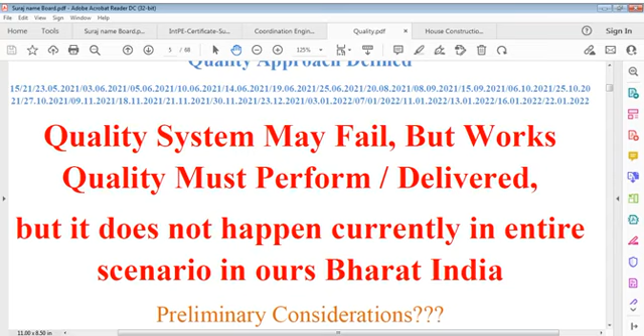You cannot sleep and just think it will work automatically, because this can cause accidents, this can cause mishappenings.

Solve all our problems ourselves. Nobody else is going to solve our problem, and that's where coordination is a very important part of life. Coordination engineering projects, public and engineers.

It is very important for reliable quality engineering deliveries - coordination engineering is a must. Professional engineering requires it, and not just for professionals; the public must also have awareness. Missing coordination means missing good engineering, and this is a very important point. Just like we say safety is a must.

Safety first - we usually call this a very common slogan. Safety is number one, which means first we have to consider safety, and then you can do whatever you wish, whatever you have planned. Even if you walk on the road, you have to keep yourself safe from vehicles, from stones lying here and there, from pits, or from whatever else, from slippery surfaces. You have to walk safely, and that means you have to look after all these points.

Missing coordination means missing good engineering. Just like we say safety first, I say quality first and quality must. We cannot say quality is second, just like safety is not second - quality is also first, but first safety has to be considered. Then in work results, quality is first and quality is a must.

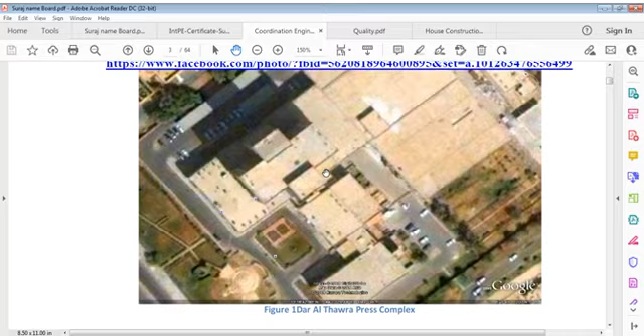And this is another project - this is Iraq, Baghdad, 1982, and this is Dar Al Thawra Press Complex, RCC Tower. This is an RCC tower, and these are towers for cores and stairs. There are so many other buildings around, but this was the tower portion, which I did as in-charge of this project on behalf of the subcontractor.

This is a file which is done for representation of formwork, how formwork is done. For that purpose, it's all line work worked up on a drawing file. It's drawn, and this is the lift well, you can say elevator well, RCC well. Generally it is done everywhere using RCC.

All these lift wells, but in our country people don't do this - they do brick work or some do block work. I have no problem with that, but here I say the lift well is RCC walling around, which can act as a shear wall as well. So it's dual purpose. Then there's another plate.

This is a photograph for an ethylene plant, located 300 kilometers from Abu Dhabi.

This is Abu Dhabi, 300 kilometers from Abu Dhabi, in Ruwais city, Ruwais industrial city. Here I worked in 2000, 2001, 2002, for around 3 years on this site on behalf of Al Jaber Energy Services, which was part of the Borouge project, Borouge 2 project, or Borouge 1, the Borouge project. Borouge is an oil company of Qatar, of UAE.

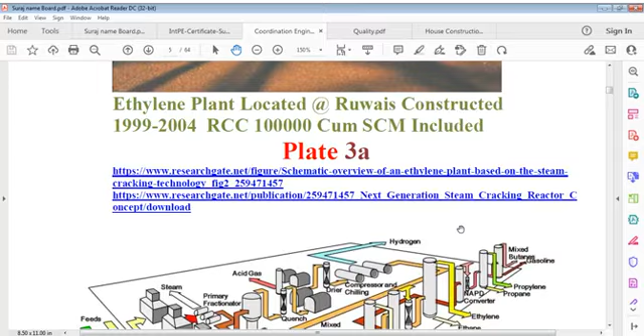This is just a procedure, a schematic drawing. I just downloaded this from one site, and here is a schematic overview of an ethylene plant based on steam cracking, from researchgate.net.

Here is another drawing of a substation, a typical RC substation located in the blast zone on that plant. It's a complete RCC framework, RCC complete cellar, an ordinary structure but an important one. This substation has to supply power after obtaining it from the mains, overhead lines, and give it to the plant.

And here is another plate for a firing range. This was constructed in 1987-88 in Barjan, 2nd Royal Guard Army camp in Qatar, on Dukhan Road, Doha Dukhan Road. This was RCC baffle walls - these are baffle walls, you can see these are baffle walls.

Here are gantries around, and there are subways. This portion is open to sky. This is a bullet trap, the main building, and here's the bullet trap chamber. This is the shooting area, and this is the firing area, with gantries this way. This is important for purpose of training.

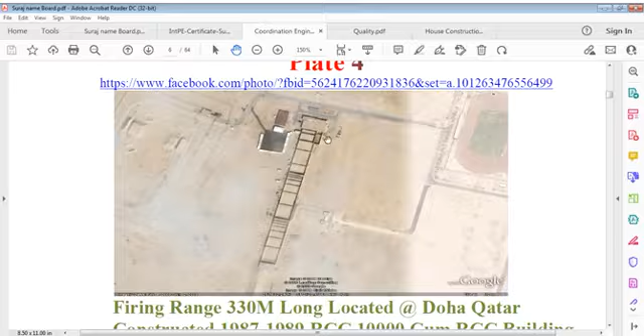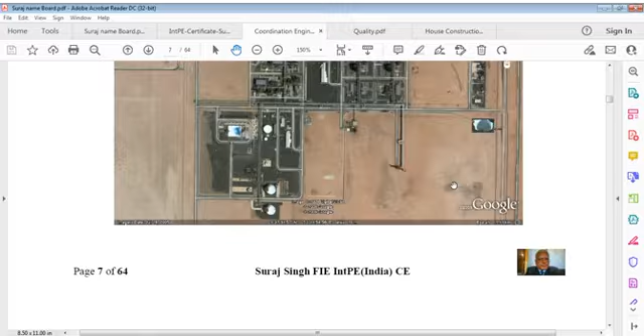And here is another one, then some details are here. This is the same, the seawater basin. We are getting water from here.

So seawater from sea, this is 84 inches, 7 feet, or 2 meters, you can see more than 2 meters. Two pipes, twin pipes we used to call it. This RCC structure is completely a pump house RCC.

This then goes here after going to all the plant where it's required to cool down equipment, and then it's returned for purpose of recirculation after treatment, and once it's gone it is then disposed of permanently.

This is also a very big water reservoir, you can say a water retaining structure, for which the quantity of water is too high, and it was complete engineering, and we did all water tests according to BS 8007.

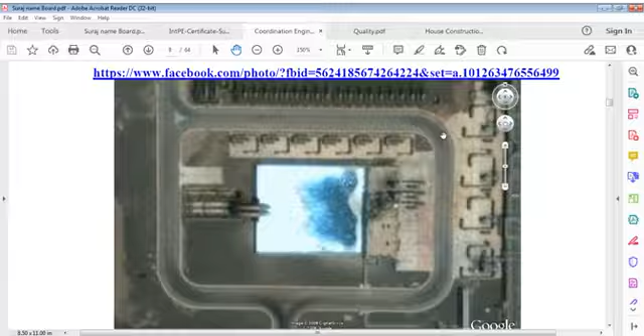And here is, you can say, another one. That plate is this record building, a very small building but very important, because it is part of the plant facility, or processing plant, located in Mesaieed, Qatar. This is outside that premises because for purpose of standby—inside there may be record keeping, but outside, in case something happens, it should serve.

And not only this, another one about 100 kilometers from here itself. This is an RCC building completely, and there's a lift, which I try to show you certain form of here. And there are some chiller units and various other service units here, on the roof likewise, and so many other points, and the water tank on the ground, service area, electrical service and other services. There's a guardhouse here, and it's very very small.

They are small or big, but the question is that we have to talk of quality. I don't feel shy in saying that it's small or big, doesn't matter.

Construction starts here in 2010. It was, you can say, Al-Tunsi company. Al-Tunsi, you may say, is the owner of this company. It's a ministry project, and it was, you can say, one for learning, but its structure had been completed before I joined—I looked after it. There was a very delayed project, you can say. Of course, it was interesting.

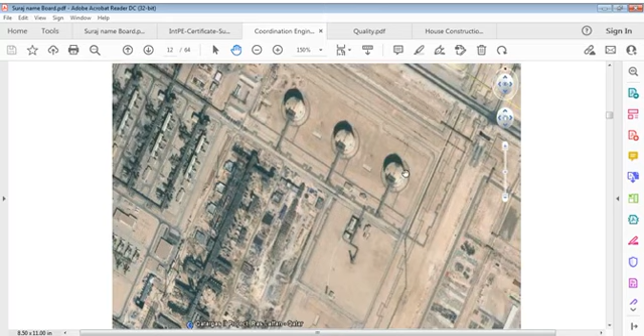And of course I go to the other one. This is the LNG plant location, Ras Laffan, Qatar. And these are the tanks I'm talking about. I talked about this already. I was part of this in

1996 - sorry, 96. These are 3 tanks constructed by the TBMM consortium, and Midmac is one of them. I worked on behalf of Midmac as office engineer for 1 year for these tanks.

My role was for surveys involved in this, and I was also technically responsible for the beach villa project in Midmac. So I learned about this, how these tanks work, and that learning is of course very good because it's a petroleum or oil project, onshore.

People know what LNG is about. There are two tanks - the external one is RCC/PSC tank, concrete, a massive one, heavy work you can call it, because walls are minimum 800 and diameter is more than 76 meters, and height is more than 50 meters. It's very heavy for containment of LNG, and that is minus 160 degrees storage.

And concrete is not for that purpose, so there's an internal tank which is of 9% nickel. You may say nickel alloy, that is for the purpose of cryogenicity, to increase the cryogenic property of the steel.

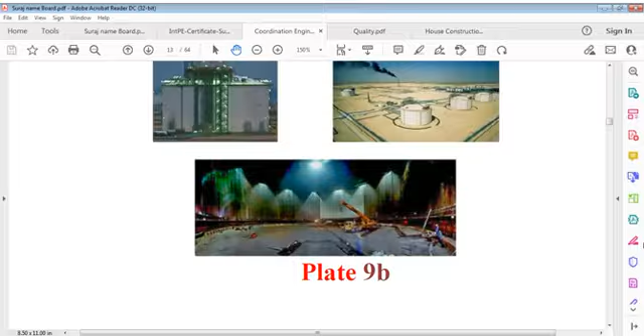Once the RCC external tank is over, this is the other tank, you can say. Here we may say that is used like that, and we have to move further onto this, and we can say that yes, it is.

And then we have here, this is during construction itself, as usual, this is the same tank. RCC stays in the construction towers, because many tower cranes are there, and I used to walk here everywhere to see at the time, and I was impressed with the quality at that time.

In '96, you can say it is 26 years back. So at that time it was good - I was impressed with the quality in that.

And this is that plant's administration area, here administrative and warehouse area as well. Very ordinary structure, this building is RCC, and this building is also RCC. All these buildings are RCC structures. Of course, this is a steel building because it's a warehouse.

And then we have this, this is very important - I'm showing you an example of coordination, you can say. Real coordination, or engineering coordination, you can name it. It's a very important point.

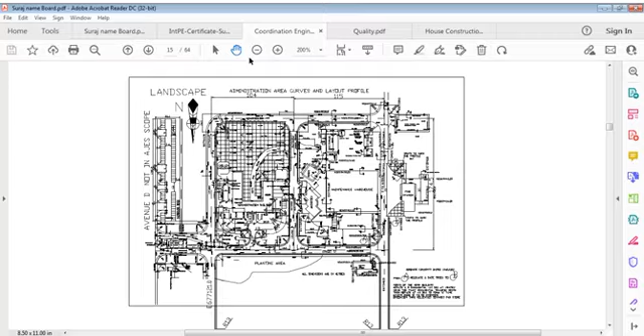Actually, I still remember that time when I was on this project, and I was busy - I tried to remain busy on such works. You may ask me why I'm telling that. Yes, I'm telling because there were no such details available, and I used to find big problems there for the purpose of coordination and engineering arrangements.

So, this is just one part. I actually worked on this as well as the complete plant, for the purpose of showing how to do it and understand it. Maybe you're not able to see this clearly, but I can show you another view so you can understand better.

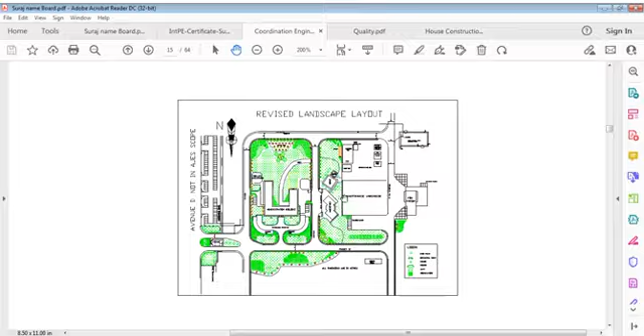This is actually the administration area, though it's a landscape drawing, that's okay. This is the administration building, this is the amenities building, this is the mass prayer building, and this is the area for the warehouse, etc. And this is other structures, and here is a certain firefighting area.

This is something different, which I just blew up. So it's the effluent area, here. You can say it's not clear, so let's blow it up more. It's the fire station, and this is disposal of waste here, and the maintenance warehouse. This is amenities, and this is the mass prayer area. Likewise, I'm not going through everything.

And here is the consumer estate gatehouse, and this is open parking, the chiller enclosed area for this building, access to this building, and this is the pathway, etc. This is generally called the administrative area.

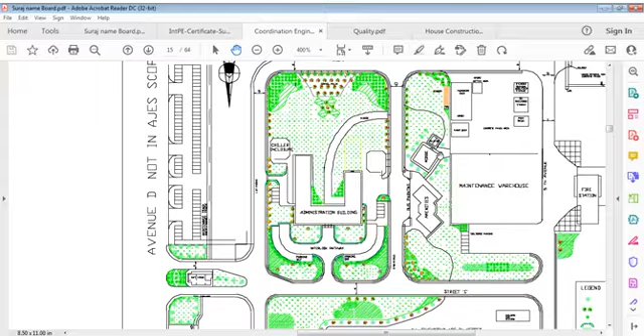Now you may be able to see why I took this, for the purpose of roads and internal streets. These are roads, you can see them coming here like this. Elsewhere, we had to work on the actual landscape and roads.

I had to set out exact information for the purpose of shop drawings for roads and shop drawings for landscape. Though it's not structural, it has to be done accurately. We did a lot of work on the landscape. I was involved personally, with no input or support from someone else, but I did a lot of work on this complete plant, and a big drawing was posted.

Actually, that should have been given by the designer, but the designer had made many pieces, produced many pieces of various parts, but I put it together like this everywhere, and I successfully did this. It helped me because I had to coordinate with various problems, and we had to produce the landscape plan and landscape details, which could not have been possible otherwise.

Still, I feel happy to see this again, though I did this myself and it took a lot of time, and people could not understand what I was doing. So I'm not a layout planner. Yet it doesn't matter what you are, it depends on your concentration.

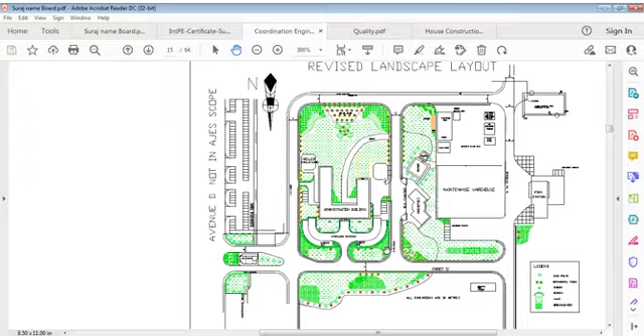And of course, for this purpose we have to do it. Then we go to, it's some, I just broke it down so you can see clearly.

Now this is again, you can say, cracking furnace, a part of that olefin plant. Very much structural work with RCC foundations only. And you can see so many piping equipment and all that, which I do not know what these are, but for purpose of foundations we have to deal with all. And same, this is another structure, steel structure with RCC foundations, and all mechanized work.

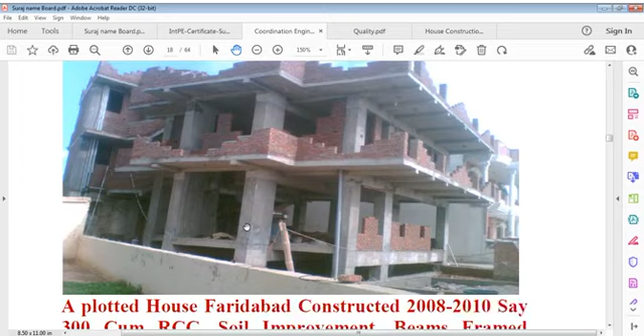Now this is RCC building, a residential building, and we can see a kind of framework. These frames, this is basement, cellar, and this is RCC beam with columns here, beams and columns, which were worked out based on Kani's rotation contribution method, not finite element, and it was done. You may see plans of that, you can find something interesting here.

I'm feeling a little cold. I don't know if temperature falls, let me check it, it's 16, still 16. I'm feeling cold, there's no reason for that because the dew point is 8, and that's the reason. So I had to be suitably oriented with this, and I just wear my protective clothing because I can't tolerate cold. So we can say very well, okay, fine.

It's now time. Now these plans I'm showing you are important from an engineering point of view. These are detailed engineering plans, only a few I am showing. There are many from a professional viewpoint, but I am showing always strictly here.

This is one plan on ground level, and here are some elevations put in that way so that it was easy to draw, because I know 2D, not 3D. I'm not very much good in 3D, I don't know what's 3D, but I haven't practiced AutoCAD for many years.

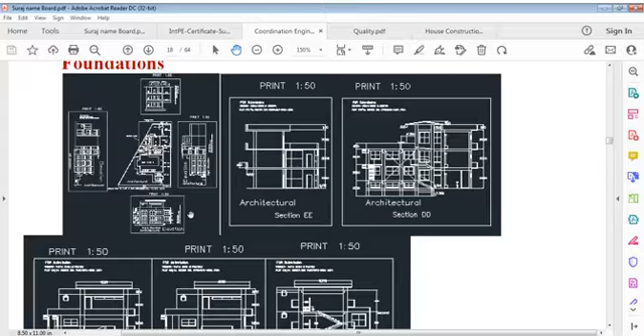And this is a certain section, and this is also a certain section. And here is the stair. You cannot say exactly what it is, but this is the main stair, it's inclined, or you can say pitched. This is the stair cover, and here is second floor. This is basement, it starts from basement, goes to the basement area, then ground floor and first floor, and this is second floor. Likewise this stands many more.

I cannot put everything here just for purpose, and so many drawings are here. I can't show that drawing also because it's in drawing format, and this is not drawing format, it's PDF. And also you can see this, and we have to go for this purposefully. And there's also structural arrangements, just a few pieces I have put in.

That's foundation plan, so maybe you may not visualize what I'm showing, it's a very different plan. My thought on foundations, where integrity of the building is involved, or where uniform distribution of load is involved, or where horizontal seismic forces are involved, horizontal seismic shear, is that I use a different method. It's neither raft, not piling, not isolated footings or independent footings, it's not all that, it's something different. And that point you have to understand very clearly.

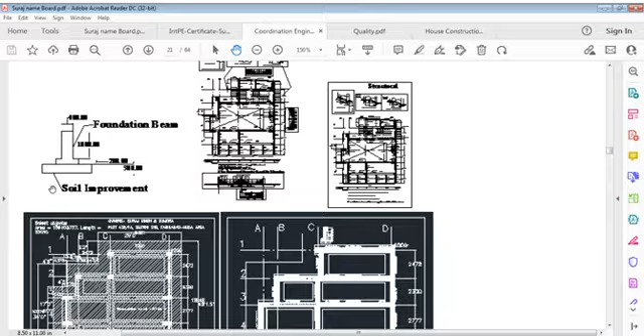I'm not simply talking, but giving you evidence that I worked on these foundations, and this foundation is very successful. It's not because there's a technical reason, but I simply think that if you use brick walls and construct a building, we assume that this is also brick, so it can't go anywhere. But important is here, this portion of rectangle.

This portion rectangle is a soil improvement, because this strata has clay up to say 8-9 meters down. We cannot transfer such load to clay, it's risky. So you have to replace a certain portion of the foundation, to change the clay or replace clay by granular material. Granular material is usually the material used in water-bound macadam road structure, a kind of same material of a different ratio and different requirements.

And on this, RCC beam has to rest. This RCC beam moves around the whole area, connecting column to column, and in fact there is no footing of conventional style, this beam connection itself is the footing. It's kind of both ways, x and y axis, it moves in the same section. So this beam holds, under ordinary loading, but when there is horizontal shear impact, this changes its function and resists seismic shears.

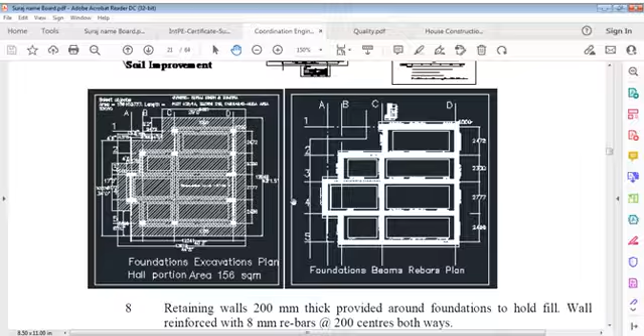And same way, here is something different, you can see. Various sketches are there, only a few sketches I am showing. In fact this is foundation and this is excavation. These are foundation beams, all foundation beams, and this is excavation scope. This is important, it takes time to understand, you see the foundation plan, a particular area you have to excavate fully, and that's what I can say now.

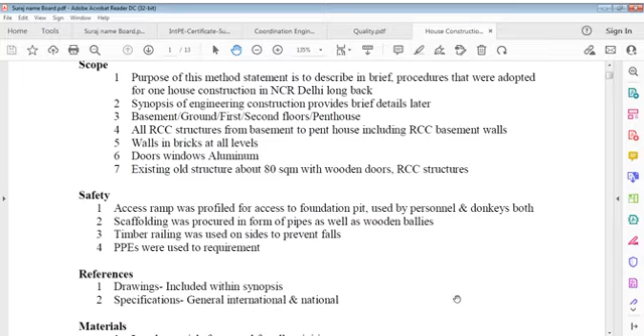I'm just first trying to show sketches, and that's very important, we can discuss that. Let me go discuss first about the purpose of these documents. What is the purpose here, why did I do that? I will just read first and then we'll discuss. It's still very important here. Okay, my percentage is at 3%, 52.

Now, the purpose of this method statement - actually it's a method statement, let us say, because we have to understand what we have to do. That is the first requirement in construction: what we are going to do, why we are going to do it, what's the background of that, all we have to know. It's not enough to just know what we are going to do. We need to know why, from where records are, what was originally recorded, and what we are doing, which I understand means it's not simply isolated work, but complete package work.

You must refer to all records, all documents, and that's the purpose of this method statement: to describe in brief the procedures that were adopted for one house construction, done long back in 2008, 2009, 2010, or beginning of 2009 to mid of 2010, about 1.5 years. Ordinary construction, but time consuming because of many reasons. A synopsis of engineering construction provides the brief details later.

Now basement was scoping - this is a basement, ground floor, first floor, second floor, penthouse, etc. All RCC structure from basement to penthouse, including RCC basement walls and walls in bricks at all levels, not in foundations. That wall of bricks also, half brick, for purpose of filling in, exists on every floor except in basement.

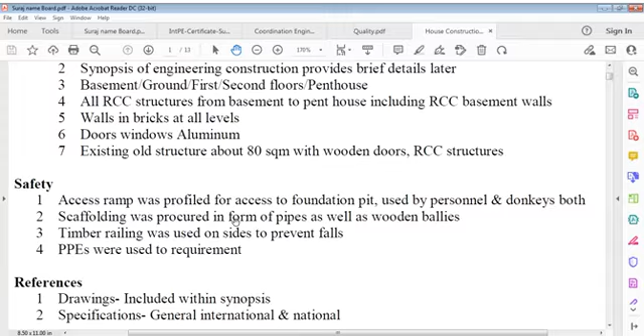There are two structures in this: one is the existing single story structure, which is about 80 square meters, and the other one is an extendable hall with first and second floor also. So what was there?

Safety - the access ramp for excavation was profiled for access to the foundation pit, used by personnel and donkeys, workers both. Scaffolding was procured in form of pipes at that time, not structural scaffolding, a cuplock system like we have these days. The scaffolding was just vertical use pipes, separate pipes, so no problem, it was braced in. Scaffolding was procured from pipes as well as wooden ballies, not for structural use, just for access use outside.

For instance, when we needed some support, I did not use ballies for vertical propping, no, it's only steel jacking. Then PPE were used as required. Timber railing was used on sides, for instance, for safety issues that I'm just giving to you.

So reference all drawings and specifications, general, international, and national. Then there's a column log of materials - local materials used for all activities. Structural materials were procured from quarries. Reinforcing bars were procured in full length at 12 and 14 meters without having any bent bars from industrial site or factory. All reinforcing bars were fabricated on site only, under direct supervision. Concrete was mixed on site since RMC was not consistent in quality. Formwork was designed using plywood and wooden battens, both hardwood and softwood.

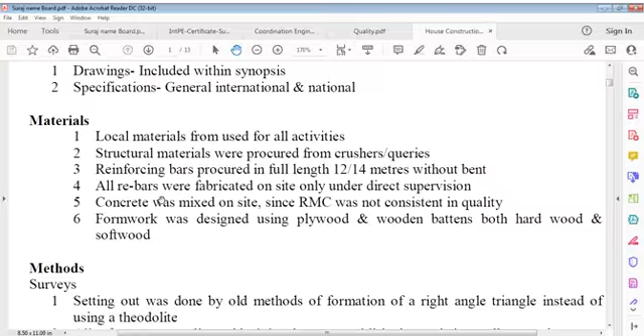Same thing happened with RMC. I wanted to use RMC, but when I talked to some RMC guy, he did not have any standard quality systems. They just say, no, this is this cost and that cost. If I raise questions about cement, about what metals they were using, that person had got no clue, no answer. So I said, there's no meaning, I can't trust you. You want to say more quantity of cement will give. And they think only cement is more important, nothing else. Will give you more quantity of cement, so many kilograms of cement. I said, thank you very much, I can't understand you.

And also these bars, we can say 12 or 14 meters bars. I said no to agency for bent bars. We have to procure only straight bars. We have to pay for trailers if you can't pay. And I did not get any bent steel. I'm dead against that, and all buildings say 95 to 98% buildings use rusted bars, bent bars, which are straightened first. You see, beauty is first you bend and you straighten them. So what do you call that? I don't understand any logic behind that.

And whatever formwork we used, our own system, our own fabrics, ply, our own designs of that, particularly in columns and slab. Because we casted column one time, 3 meters column or 3.5 meters column or whatever it was, it was casted full height one time.

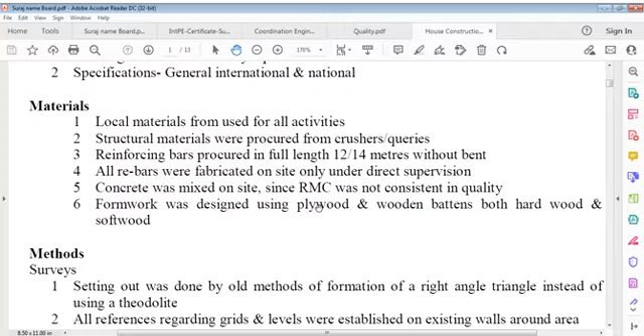Method statements are very, very simple. Sometimes if you know what you have to do, if you know the sequence, then it's only a kind of format filling. So you are not going to do any research work, because research is already available, and what you learned, that's also a kind of research.

So we have to be very careful, and in fact, for this building, we did not have any theodolite to start it. But this is a small plot, and stones are clear. You have to... so you can see that setting out was done by the old method of formation of triangle, right angle triangle, which is 3 base, 4 height, or you can say 3 is base and 4 is plumb or right angle. Then if you join both corners vertically and horizontally, you get a diagonal.

Diagonal is important here for purpose of right angle formation, and that is 3, 4 and 5. Just 3, 4 and 5, that's the meaning of that right angle triangle.

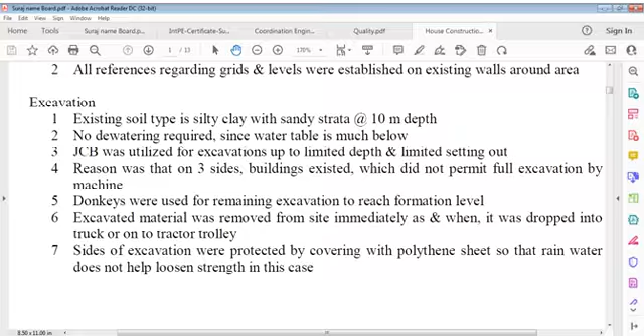Donkeys were used for the remaining portion of excavation that could not be reached by excavator. Excavated material was removed from site immediately as it was dropped into a truck or onto a tractor. Excavation sides were protected by covering with polythene sheet so that rainwater does not help loosen the strength of the strata.

Blinding is a very common term these days, but not in our country. We had different terminology. My God, something plastic again for me.

Since soil bearing capacity was not safe to allow heavy structures of this sort, soil improvement was conducted by formation of an improved layer 300 mm deep, as explained later.

You see what's happening, gastric again.

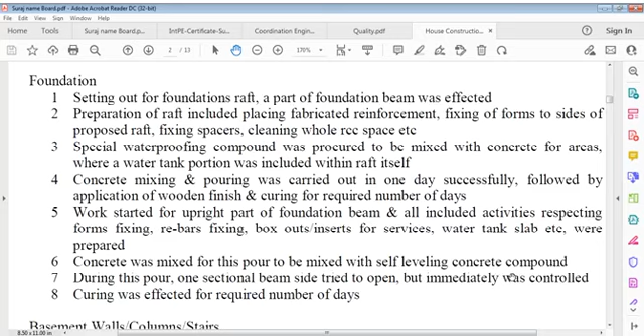All included activities - erecting forms, fixing rebars, fixing box outs, inserts for services, water tank, slab, etc. - were prepared. Concrete was mixed for this pour, to be mixed with self-leveling concrete compound. During this pour, one sectional beam side tried to open, but it was controlled. Curing was effected for the required number of days.

This is just a brief on these beam foundation walls - only brief because it's a different type of work. Conventionally people don't follow it; it's completely structural design based work, and therefore a little different. Beams are not very common in foundations, but I standardized it and I can say it's very useful. There's a reason for that.

If you use isolated footings or independent footings, you won't get as much resistance as in this case with beams. If I use isolated footings, I may have to use compound footings if required, and if not, then ordinary center footings, but we'd have to do cantilever calculations on that - which means an expensive option. But in this case, when all are combined together, cantilever doesn't mean anything. If there's some meaning of cantilever, it's only for the spreader - just 200 and 200 both ways, 200mm this way to one foundation, then 200mm that way. That's not going to work in this case.

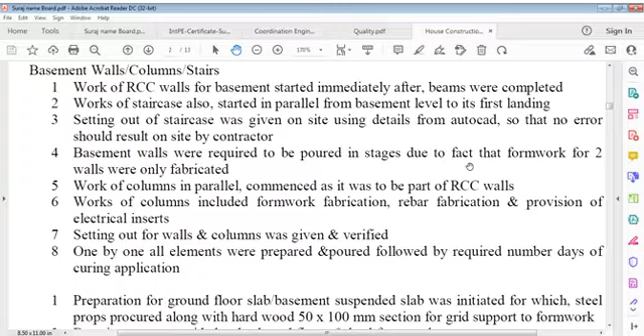It's 5 o'clock. How much time have we gone? 1 hour 19 minutes only.

So we can say work of columns in parallel commenced as it was to be a part of RCC wall. Work of columns included formwork fabrication, rebar fabrication, and provision of electrical inserts. Setting out for walls and columns was given and verified. One by one, all elements were prepared and poured, followed by required number of curing applications.

Now it's only a few lines I give to you. The problem is we have to understand coordination. Sometimes I give you my own writing for coordination, and it is really interesting to read. It's in book form, an important one. At that age I wrote it, and still it works, I think. Still it works, and that is the beauty of it. It's not because I have to tell you what it is, but because it's a very important one. It is a coordination issue. That's the important one.

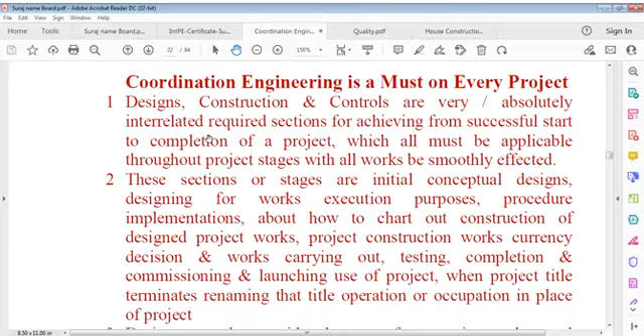If an item is misordered, delivered, and even installed, test results shall reveal its unworthiness, and replacement shall jeopardize the price of the contractor and the working of the system. So sanitary planning should be rated as a special element in civil engineering construction for building projects.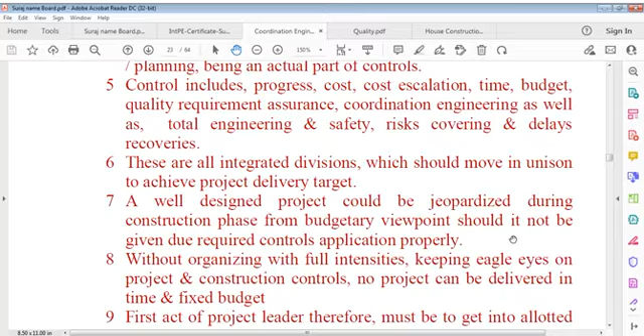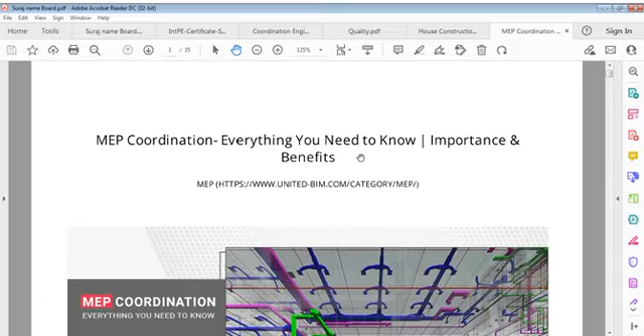Now to go ahead, the MEP coordination file is here, and we can blow it up a little. You can see this file here, I'll show this as MEP coordination. You can see this drawing. This is definition, process, importance, use of BIM benefits, approaches, etc. You can see various services here, and this is the introduction of MEP coordination, coordination design philosophy, so we have to design coordinate drawings, etc.

Now, what does MEP coordination have to do with this? If you don't have time to read the whole big document now, there's no worry at all. We'll send you a copy so you can read it when it's convenient for you. Just let us now know about the building design phases.

The American Institute of Architects Pittsburgh has separated building design into 5 phases: pre-design, schematic design, design development, construction document, and construction. So now, what are the approaches for design coordination of a construction project? Traditional approach.

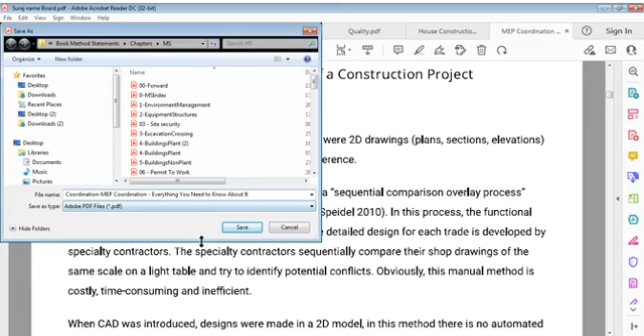For many centuries, we can say, the basis of architecture projects were 2D drawings - plan, sections, elevations, those elements. It is hard to find out interference.

For many centuries, the basis of architecture projects were 2D drawings - plan, sections, elevations - and in those drawings it was hard to find out interference. Traditionally, MEP coordination is conducted through a sequential comparison overlay process. In this process, functional design is prepared by the consulting engineer, while detailed design for each trade is developed by the specialty contractor. Specialty contractors sequentially compare their shop drawings of the same scale on a light table and try to identify potential conflicts. Obviously, this manual method is costly, time consuming, and inefficient.

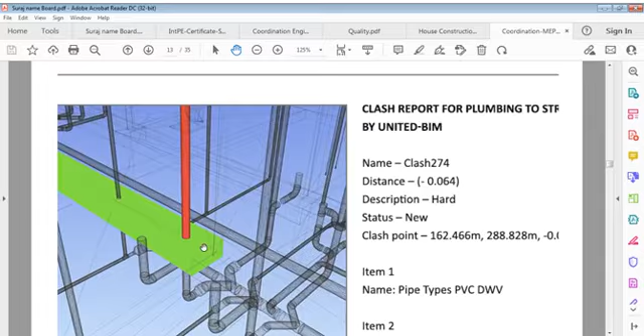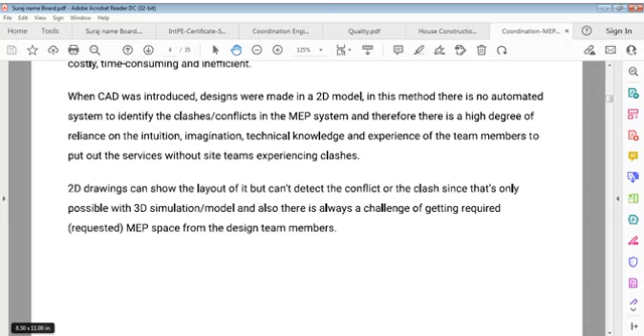We are not interested in conflicts at this moment. We're interested in what to do, how to do it. I'm not interested in 3D modeling also.

With respect to MEP coordination, the traditional design process relies on completed design from all project participants - that is trades and disciplines - while in the BIM-based approach, it starts in the earliest form of design development.

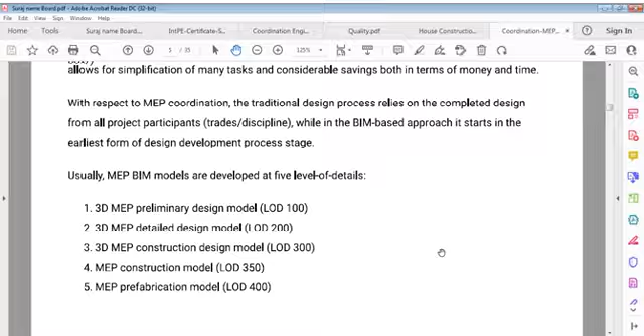It says usually MEP BIM model, I'm not interested in this. See, this is unnecessary, I'll remove this if it's that one. Now we are just seeing what stages are there.

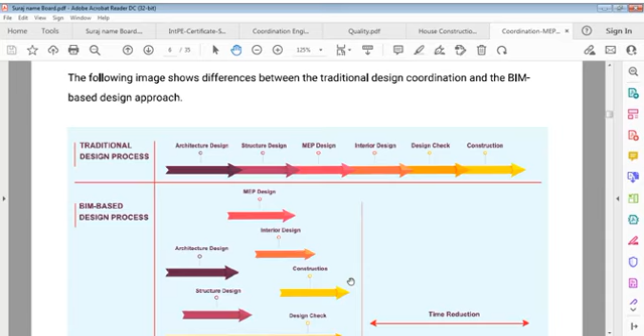In fact, traditional design process is architectural design, structural design, MEP design, interior design, then construction. BIM-based design is MEP design, interior design, architecture, then construction.

I'll just leave it on this. It's all practical, non-practical - I don't think it's very constructive here.

Let's go to architectural, structural, civil, landscape, mechanical, electrical, plumbing, kitchen specific, elevators - all this we know, no problem here. If it's advertisement, I don't care about that in that case.

MEP coordination, everything you know about, is still that. But actually what happens is design development, and before that is pre-design, schematic design, and develop design. So we all discussed about this construction workflow, and that's not a big issue.

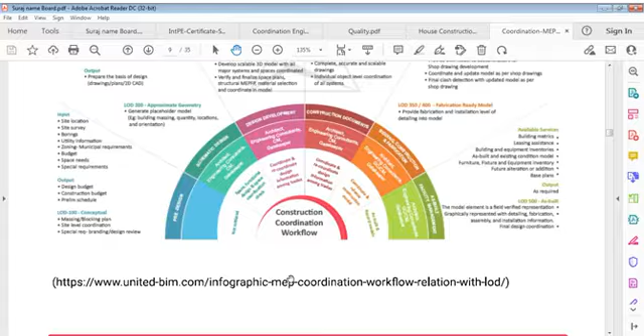About building design systems - architectural system, structural system, building systems - and we know structural, building services, HVAC, electrical, plumbing, vertical transportation, life safety systems, and structural systems: elements providing static equilibrium against gravity and dynamic loads - that's what it says.

We have interior systems - occupied space encompassing partitions, finishes, lights, acoustics and furniture - and site service systems: landscape and support systems for the building, including parking areas.

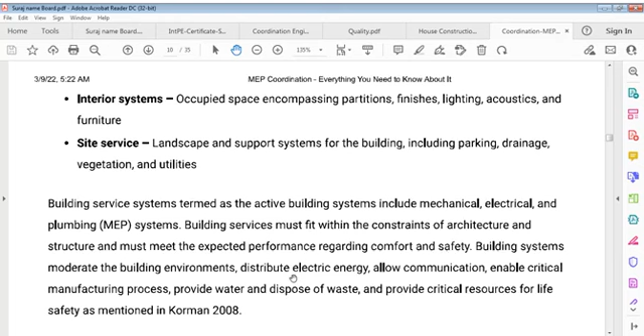Building service systems termed as the active building systems including mechanical, electrical and plumbing. MEP, usually called building services, must fit within the constraints of architecture and structure and must meet expected performance regarding comfort and safety.

Building systems moderate building environments, distribute electrical energy, allow communication, enable critical and formal manufacturing processes, and provide water and disposal of waste. All scope of building services systems is continually increasing due to increasing requirements of building users.

Building projects now include more than traditional mechanical, electrical, plumbing. This includes fire protection controls, process piping, and telephone, datacom, etc.

MEPFS coordination is a practice of multidisciplinary collaboration of three major design verticals of any building infrastructure: architectural, structural (beams, columns, torsion), and MEP designs.

Active systems of a building, namely mechanical, electrical, plumbing, and fire safety frameworks, are fundamental components of any building. They have been estimated to cost up to 60% of the total cost of a building as per Korman and Huey-King 2013.

Mechanical, electrical, and plumbing coordination is one critical activity.

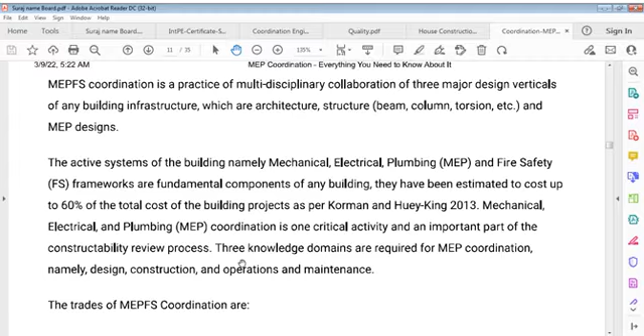Three knowledge domains are required for MEP coordination, namely design, construction, operation, and maintenance. The trades involved can include mechanical systems - HVAC equipment and distribution such as cooling towers, air handling units, ducting, etc.

Electrical systems include panels, switchboards, elevators, transformers, cable trays. Plumbing and sanitary systems include pumps, water holding tanks, pool filtration equipment, sump, sewage pit pumps, grease and sand traps.

Fire systems include fire sprinkler pumps, sprinkler tanks, fire shutters, smoke curtains, fire safety tanks, piping systems outside the buildings, external works, rooftop, and external faces of the building.

MEP coordination is all about detecting and resolving clashes among trades - architectural, structural, mechanical, electrical, plumbing, and fire safety - before construction starts.

To keep harmony between these separate designs, it's essential to have coordination of updated designs of each discipline. Each discipline must be precisely aware of the locations of other installations during modeling phases, and this can only happen when the latest, most precise version of the master plan is made available. It may happen that these designs have collisions or clashes in some locations, where one or many components are occupying the same space. It's very crucial to get knowledge of these clashes at an earlier stage of construction.

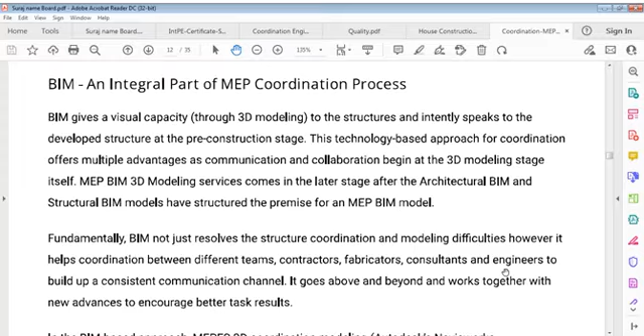Now about BIM - I'm not interested to discuss what that is, I'm not going to work on this. I don't have a good fundamental idea of this, you can say.

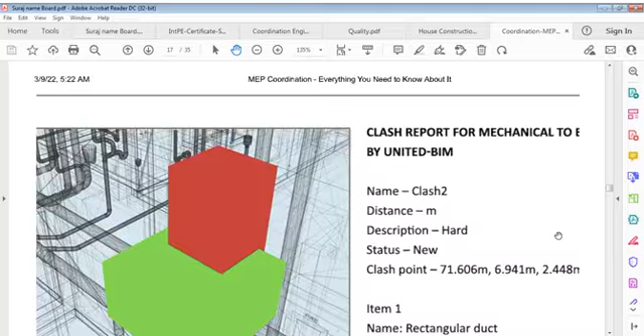Mechanical to plumbing, electrical to mechanical, plumbing to structural - top 10 causes of clashes found with design coordination. This is here.

I should close this file. That's not as much as expected. Let me go back to the other one - MEP coordination. I close this one. Let me see what else is there. I'll close this and take another one here. This is MEP coordination, services coordination from building services again.

Coordination can be defined as a process of management. Let me see what emerald.com says. It's emerald.com, saying - it's not HTML, no problem. Let me see if it is also about improving building services coordination at the pre-installation stage.

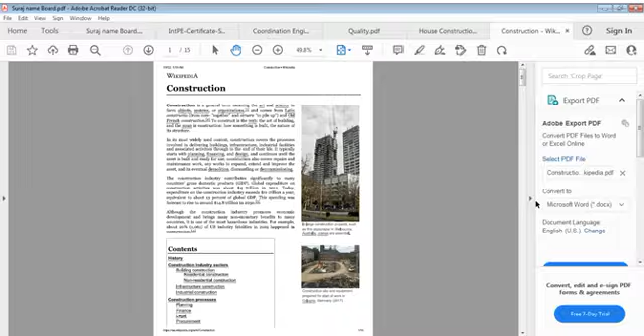This can take some time. Let's see what Wikipedia says again. You can see this page now. Let me check it also for constructability. Construction Wikipedia—okay, construction is fine. Construction is a general topic meaning the art and science to form objects, systems, and organizations, and comes from Latin. We'll leave that for now.

In its most widely used context, construction covers processes involved in delivering buildings, infrastructure, industrial facilities, and associated activities through to the end of their life. It typically starts with planning, financing, and design, and continues until the asset is built and ready for use. So asset is important here.

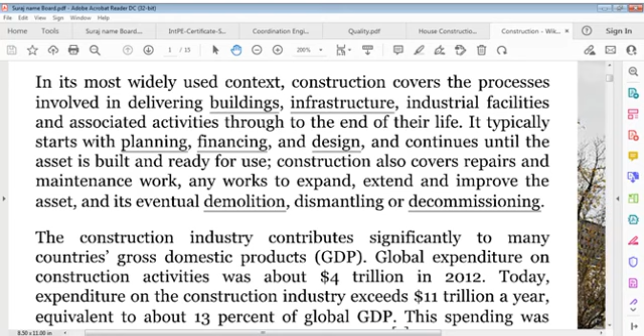Construction also covers repairs and maintenance works, and works to expand, extend, and improve assets, and its eventual demolition, dismantling, or decommissioning. The construction industry contributes significantly to many countries' gross domestic product, GDP. Although the construction industry promotes economic development and brings many non-monetary benefits to many countries, it's also one of the most hazardous industries.

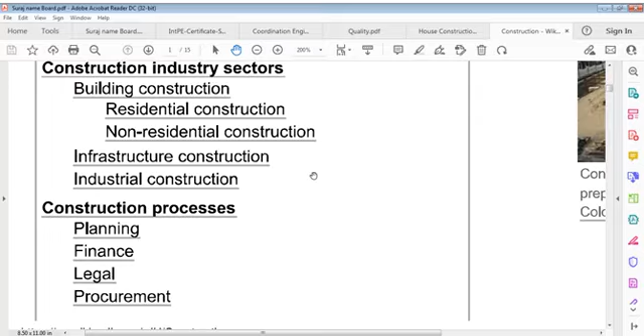So we have construction industry sectors: building construction (residential, non-residential), infrastructure construction, industrial construction, and the construction process—planning, finance, legal, procurement, traditional and design-build, construction organization, management, design, on-site construction, commissioning and handover, maintenance and repair, demolition, industrial scale and characteristics, economic activity, construction GVA by country, careers, unskilled labor, safety, sustainability, and history.

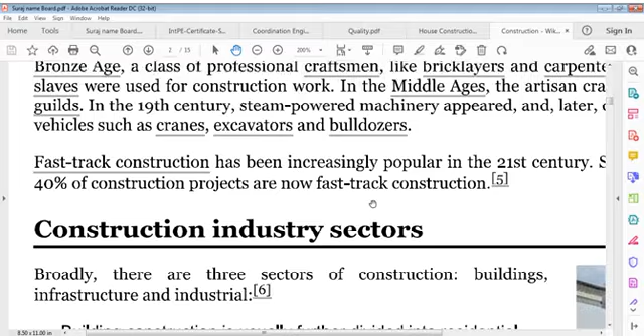If you take history into consideration, there's a long way to go. So we should discuss construction industry sectors broadly. There are three sectors in construction: buildings, infrastructure, and industrial—so construction in buildings, infrastructure, and structure.

Building construction is usually further divided into residential and non-residential. Infrastructure, called heavy duty, heavy civil, or heavy engineering, includes large public works—dams, bridges, highways, railways, water and wastewater distribution. Industrial construction includes offshore construction, mainly of energy installations, mining and quarrying, refineries, chemical processing, power generation, mills and manufacturing plants.

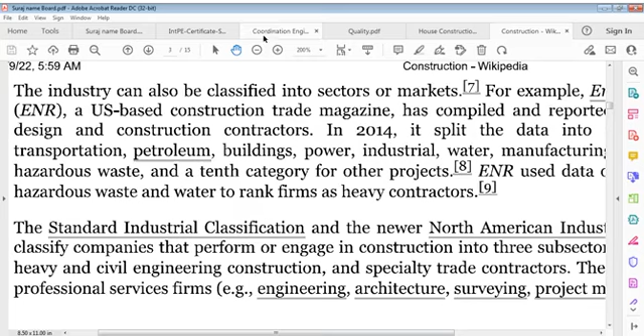The industry can also be classified as sectors or markets. For example, Engineering News-Record, called ENR.

This US-based construction trade magazine has compiled and reported data on both design and construction contractors. In 2014, it split data into 9 market segments: transportation, petroleum, buildings, power, industrial, water, manufacturing, sewer waste, telecom, hazardous waste, and a 10th category for other projects. ENR uses data on transportation, sewer, hazardous waste, and water to rank firms as heavy contractors.

The Standard Industrial Classification and North American Industry Classification System classify companies that perform or engage in construction into 3 contractor subsectors: building construction, heavy and civil engineering construction, and specialty trade contractors. There are also categories for professional services firms: engineering, architecture, surveying, and project management.

Building construction. Building construction is the process of adding structures to areas of land, also known as real property sites. Typically, a project is instigated by or with the owner of the property, who may be an individual or any other entity.

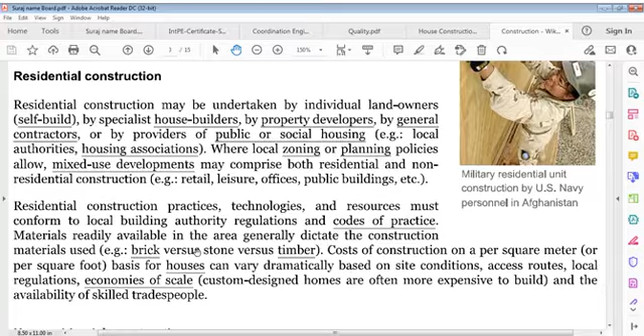Residential construction practices, technology, and resources must conform to local building authority regulations and codes of practice. Materials readily available in the area generally dictate construction material use: bricks versus stone versus timber. Cost of construction is per square meter or per square foot. The basis for houses can vary dramatically based on site conditions, access routes, local regulations, economies of scale, and the availability of skilled tradespersons. Custom-designed homes are often more expensive to build.

Non-residential construction, depending upon the type of building, can be procured by a wide range of private and public organizations, including local authorities, education and religious bodies, transport undertakings, retailers, hoteliers, property developers, financial institutions, and other companies. Most construction in these sectors is undertaken by general contractors.

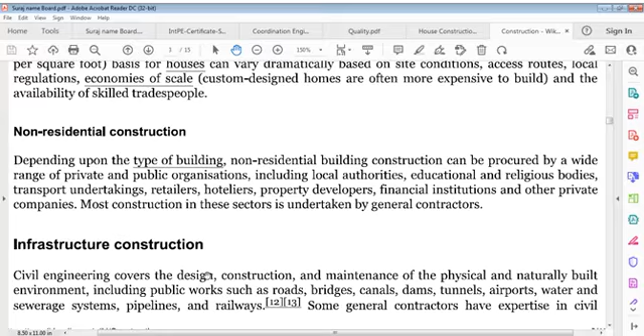Then infrastructure contractors. Industrial construction includes offshore construction, mainly of energy installations such as oil and gas platforms and wind power, as well as mining and quarrying, refineries, breweries, distilleries, and other processing plants, power stations, mills, warehouses, and factories.

Construction process. Some construction projects are small renovations or repair jobs, where the owner may act as designer, paymaster, and laborer for the entire project.

However, more complex or ambitious projects usually require additional multidisciplinary expertise and manpower, so the owner may commission one or more specialist businesses to undertake detailed planning, design, construction, and handover of the work. Often owners appoint one business to oversee the project.

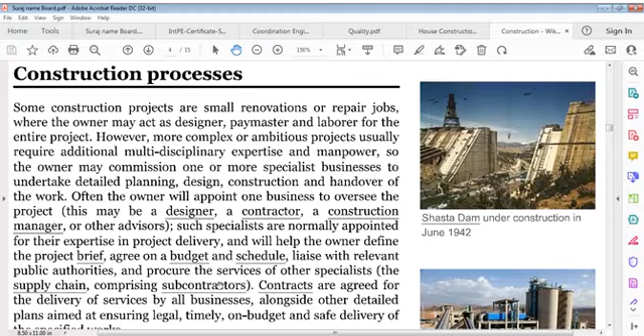This may be a designer, contractor, construction manager, or other advisor. Such specialists are normally appointed for their expertise in project delivery, helping the owner define the project brief, agree on budget and schedule, and liaise with the relevant supply chain comprising subcontractors. Contracts are agreed for delivery of services by all businesses, alongside detailed plans aimed at ensuring legal, timely, on-budget, and safe delivery of specified work. Design, finance, and legal aspects overlap and interrelate.

Design must not only be structurally sound and appropriate for its use and location, but must also be financially possible to build and legal to use. The financial structure must be adequate to build what the design provides for, and payments must be made.

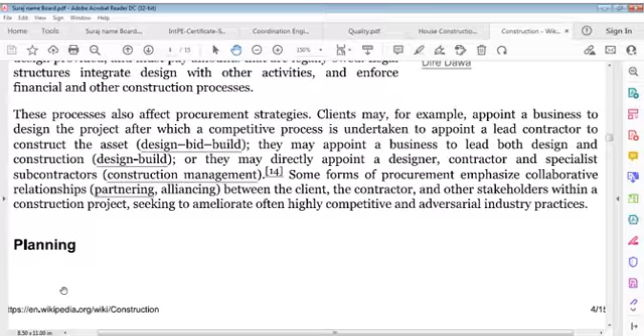This process also affects procurement strategies. Clients may, for example, appoint a business for design, or this is planning. What is planning?

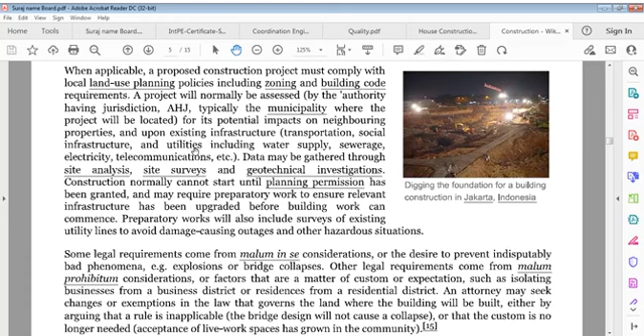Ultimately, we can say that when applicable, a proposed construction project must comply with local land use planning, and also this is here for the construction process.

Some construction projects are small renovations - this is very easy. Small but complex and ambitious projects usually require additional multidisciplinary expertise and manpower workforce. So the owner may commission one or more specialist businesses to undertake that responsibility, and this happens in this field.

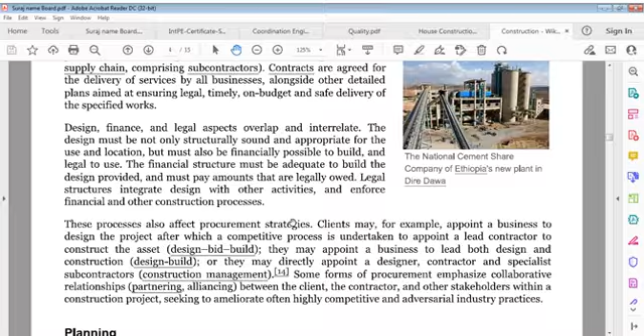The owner appoints certain designers, contractors, and likewise, design, finance and legal aspects overlap and interrelate. Design must not only be structurally sound and appropriate for use or location, but also financially possible to build and legal to use. The financial structure must be adequate to build the design provided, and must pay amounts that are legally owed. Legal structures integrate design with other activities and enforce financial and other construction processes.

These processes also affect procurement strategies. Clients may, for example, appoint a business to design the project, after which a competitive process is undertaken to appoint a lead contractor that may appoint a business to lead both design and construction - design build - or they may directly appoint a designer, contractor, and specialist subcontractors. Some forms of procurement emphasize collaborative relationships, whatever it is.

Now this is planning. When applicable, a proposed construction project must comply with local land use planning policies, including zoning and building code requirements. A project will normally be assessed by the authority having jurisdiction where the project will be located, and the municipality, for example, for potential impacts on neighboring properties and upon existing infrastructure, transportation, social infrastructure, utilities - all that data may be gathered together with site surveys.

Geotechnical investigations - construction normally cannot start until planning permission has been obtained, and may require preparatory works to ensure relevant infrastructure has been upgraded. Preparatory works will also include surveys of existing utility lines to avoid damage causing outages and other hazardous situations.

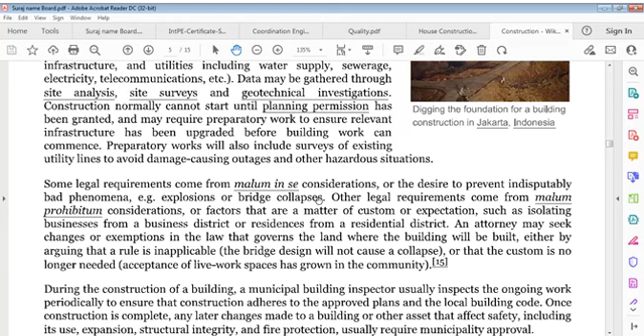Some legal requirements come from malum in se - consideration or desire to prevent indisputably bad phenomena, namely explosions or bridge collapse. Other legal requirements come from malum prohibitum, considerations, or factors that are a matter of custom or expectation. An attorney may seek to change this.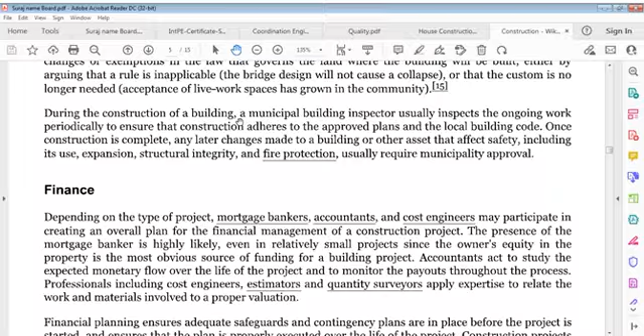Now, during construction of a building, a municipal building inspector usually inspects ongoing works periodically to ensure that construction adheres to approved plans and local building codes are not violated. Once construction is complete, later changes may be made to the building or other assets that affect safety, including expansion, structural integrity, and fire protection - these usually require municipal approval.

Finance: depending on the type of project, mortgage bankers, accountants, and cost engineers may participate in creating an overall plan for financial management of a construction project. The presence of a mortgage banker is highly likely, even in relatively small projects, since the owner's equity in property is the most obvious source of funding for a building project. Accountants act to study expected monetary flow over the life of the project and to monitor payouts throughout the process.

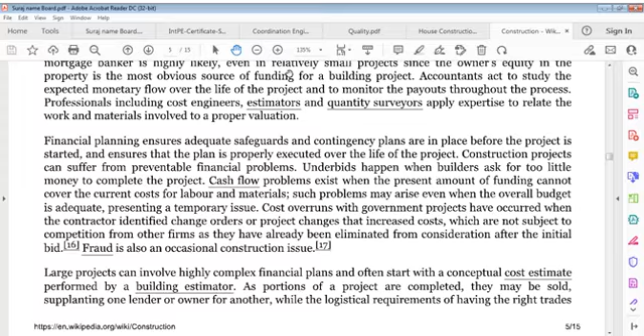Professionals including cost engineers, estimators, and quantity surveyors apply expertise to relate work and materials involved to a proper valuation. Financial planning ensures adequate safeguards and contingency plans are in place before a project is started, and ensures a plan is properly executed over the life of the project.

Construction projects can suffer from preventable financial problems. Underbids happen when builders ask for too little money to complete a project. Cash flow problems exist when the present amount of funding cannot cover current costs.

Underbids happen when builders ask for too little money to complete a project. Cash flow problems exist when the present amount of funding cannot cover current costs for labor and materials. Such problems may arise even when the overall budget is adequate.

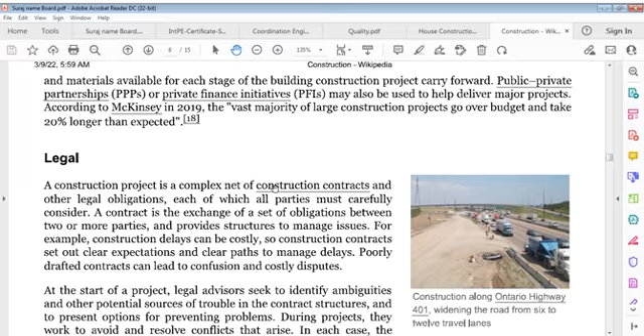A construction project is a complex net of construction contracts and other legal obligations, each of which all parties must carefully consider. A contract is the exchange of a set of obligations between two or more parties and provides structures to manage issues.

For example, construction delays can be costly, so construction contracts set out clear expectations and clear paths to manage delays. Poorly drafted contracts can lead to confusion and costly disputes.

At the start of a project, legal advisors seek to identify ambiguities and other potential sources of trouble in contract structures, working to avoid and resolve conflicts that arise. In each case, the lawyer facilitates an exchange of obligations that matches the reality of the project.

Procurement: traditional or design-bid-build. Design-bid-build is the most common and well-established method of construction procurement. The architect, engineer, or builder acts for the client as project coordinator.

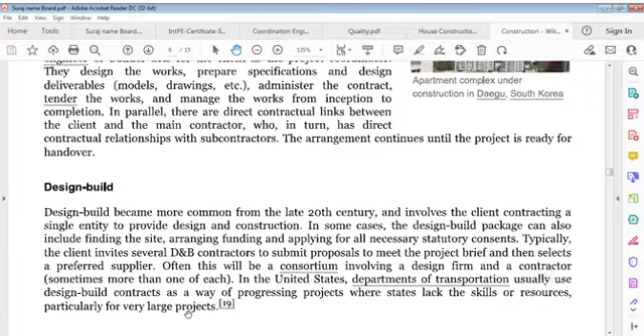Now, design-build became more common from the late 20th century and involves the client contracting a single entity to provide design and construction. In some cases, the design-build package can also include finding a site, arranging funding, and applying for all necessary statutory consents.

Typically, the client invites several D&B contractors to submit proposals to meet the project brief and then selects a preferred supplier. Often this will be a consortium involving a design firm and a contractor, sometimes more than one of each. In the United States, Departments of Transportation usually use design-build contracts as a way of progressing projects where states lack skills or resources, particularly for very large projects.

Now, what is design within design-build? In the industrialized world, construction usually involves the translation of designs into reality.

Most commonly, in a design-build project, a design team is employed in contract with the property owner, depending upon the type of project. A design team may include an architect, civil engineer, mechanical engineer, electrical engineer, structural engineer, fire protection engineer, planning consultants, architectural consultants, and archaeological consultants.

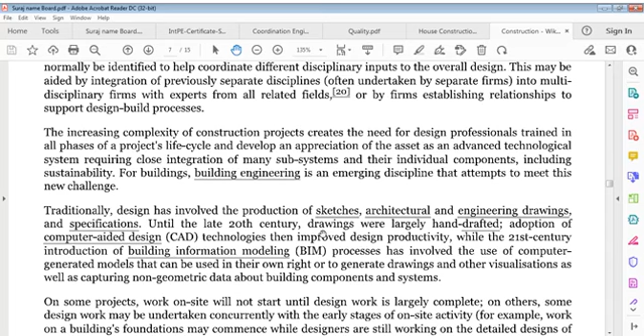Building engineering is an emerging discipline that attempts to meet this new challenge: increasing complexity of construction projects creates a need for design professionals trained in all phases of a project's life cycle and to develop an appreciation of the asset as an advanced technological system requiring close integration of many subsystems and their individual components, including sustainability. Traditionally, design has involved production of sketches, architectural and engineering drawings, and specifications. Until the late 20th century, drawings were largely hand-drafted.

Drafted adoption of computer-aided design technologies improved design productivity, while the 21st century introduction of building information modeling has involved the use of computer-generated models that can be used in their own right or to generate drawings and other visualizations, as well as capturing non-geometric data about building components and systems.

On some projects, work on site shall not start until design work is largely complete, while some design work may be undertaken concurrently with early stages of on-site activity. For example, work on a building's foundations may commence while designers are still working on detailed designs of internal spaces. Some projects include elements designed for off-site construction that are delivered to site ready for erection, installation, or assembly.

On-site construction begins once contractors and other relevant professionals have been appointed and designs are sufficiently advanced, work may commence on project sites.

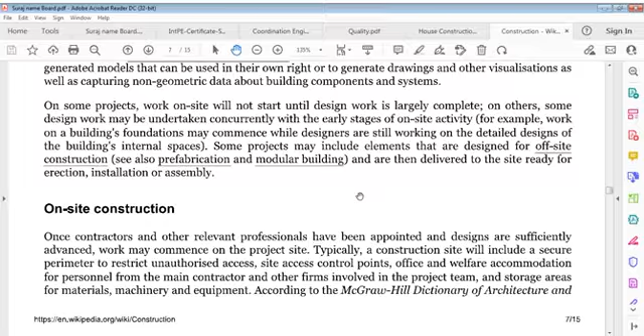Typically, a construction site includes a secure perimeter to restrict unauthorized access, site access control points, office and welfare accommodation for personnel from the main contractor and other firms involved in the scheme, plus storage areas for materials, machinery and equipment, according to McGraw-Hill's Dictionary of Architecture and Construction definitions.

Construction may be said to have started when the first feature of the permanent structure has been put in place. Commissioning and handover follows: commissioning is the process of verifying that all subsystems of a new building work as intended to achieve the owner's project requirements as designed by project architects and engineers. This is followed by maintenance, repairs and improvement, and eventually demolition.

Industry skills and characteristics we'll discuss later on.

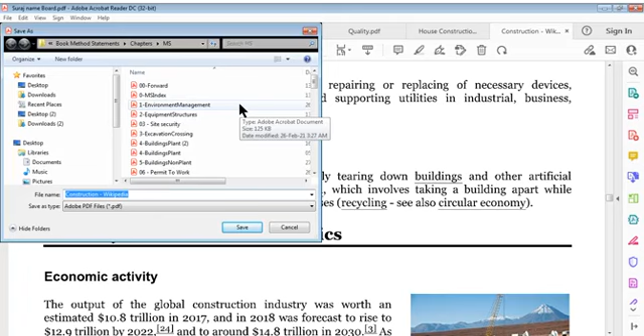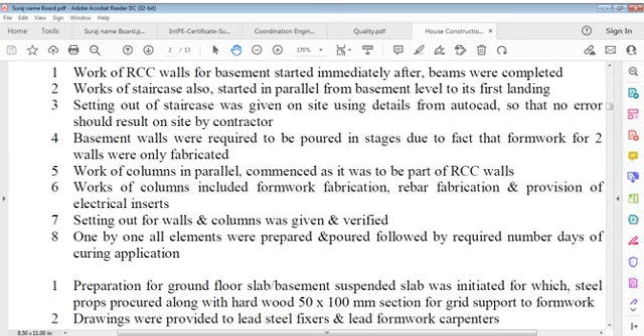As we move onwards, we find this. Now it is about 3 hours already gone. No problem, 3 hours in the house, that's not a big problem. Here is construction of the house we're talking of, and talking of basements. We'll continue this also, second page only, but we'll talk of this also, which is also important for this.

In this file regarding this house, for that purpose I moved away from this, and also certain quality and coordination issues and certification that we started here in the House Construction talk. We'll take up this issue.

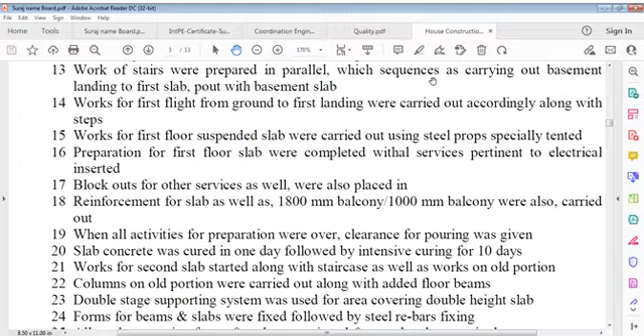It's also very important, and you can say it's very elementary, but it's very important, as we have given certain records of this house's foundations, and it's really informative, very informative, and we may say in that way we will go to see how this work.

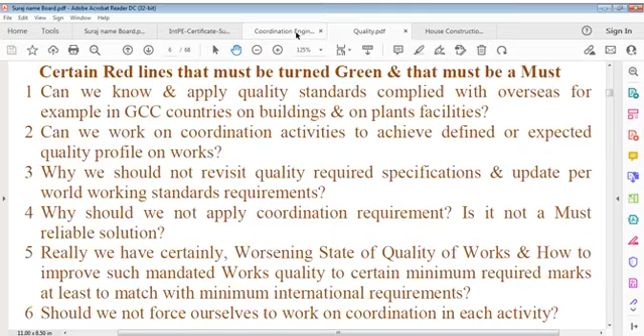In this quality file and this coordination file, we have something that's wonderful. You can say, if I just blow it down and say that.

Because we have discussed these slides which are very important from every point of view, we have gone through all this to learn something, to revise something, to refresh something, and it's really interesting in this coordination engineering world.

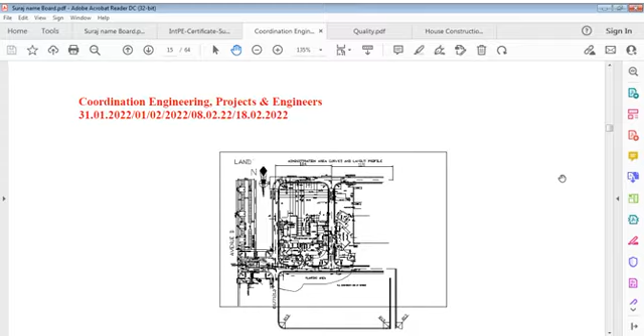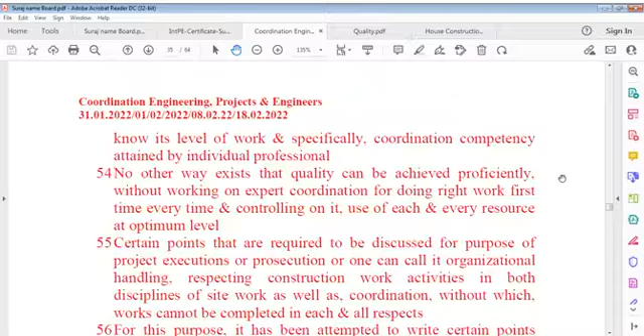Coordination, though it has nothing to do with BIM, is a mental state coordination, you can say. Sometimes it's difficult to work with software in plain works, where the mind can reach and solve problems. Some problems are isolated and solved on a particular site - not major design problems, but site problems. Sometimes we have to resolve problems on site, and that happens.

It's very interesting that these problems happen on sites, and we have to take care of that. So many issues on this, and I'll see what can be done in this case. It's wonderful to see that we have covered today quality, coordination, engineering projects, reliable engineers, communication, concrete engineers, etc.